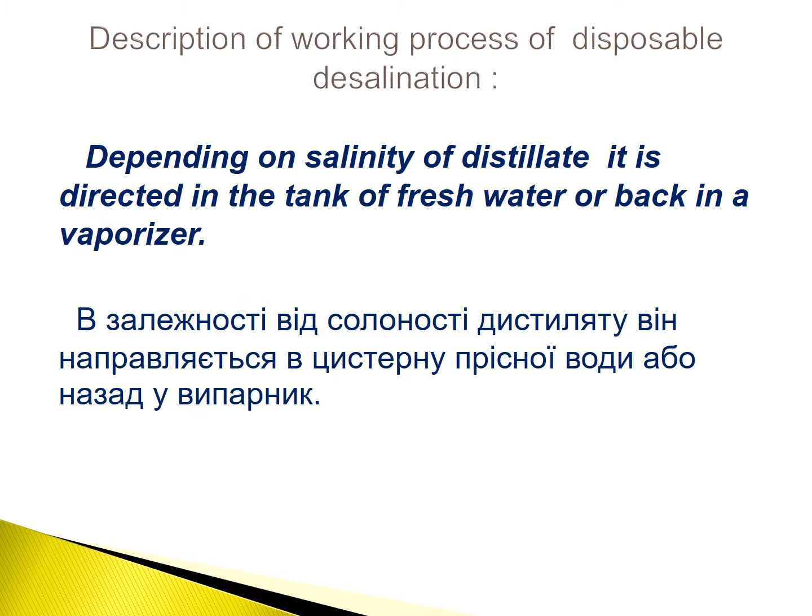In this technical video, we will understand the construction and working of a marine freshwater generator. Freshwater generator is used to generate freshwater from seawater on ships. The produced freshwater is mainly used for drinking purpose, for boiler water system, and for other freshwater consumptions.

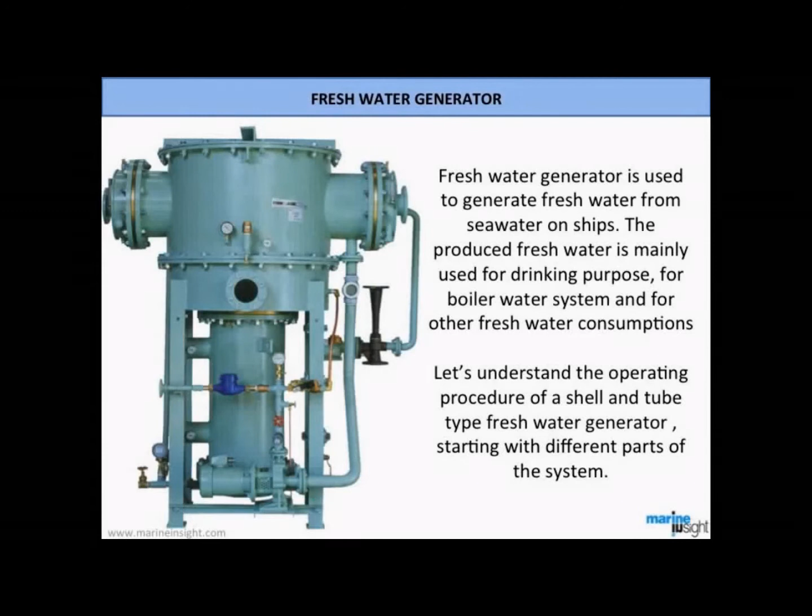Let's understand the operating procedure of a shell and tube type freshwater generator, starting with different parts of the system. The first component is a freshwater pump, which is used to supply the generated freshwater to ships' freshwater tanks by taking the suction from the generator. The normal rated capacity varies from 3 to 5 meter cube per hour, which depends mainly on the supply head.

The next component is the ejector pump, which supplies pressurized water to the ejector for creating vacuum. It also supplies cooling water to condenser. Rated capacity varies from 25 to 30 meter cube per hour and pressure 3 to 6 bar.

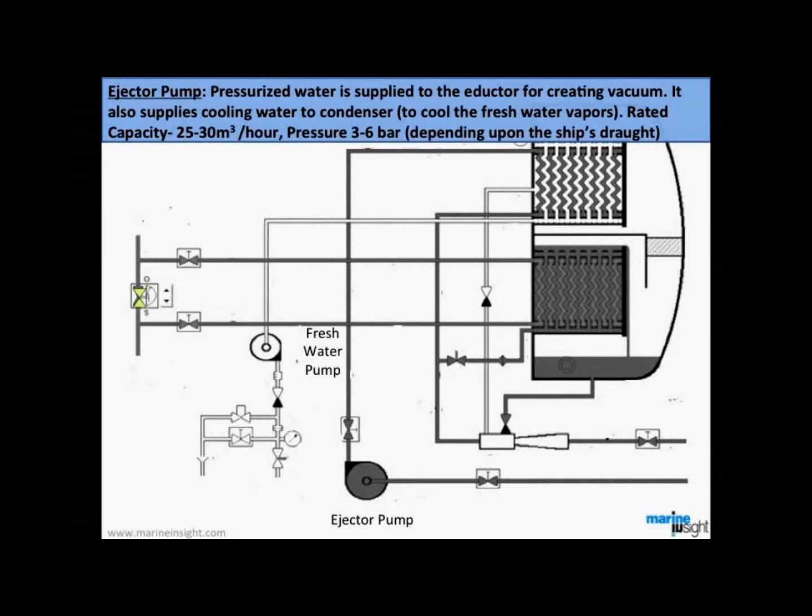Air and brine eductor is used to remove the accumulated brine from the generator and to create the necessary vacuum. Evaporator is used to boil off the seawater at lower temperature with the help of vacuum created inside the freshwater generator shell.

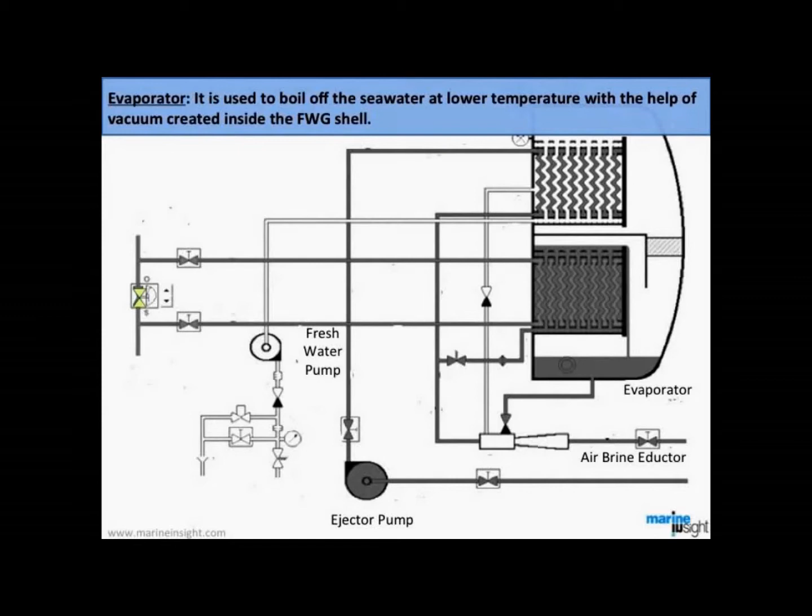Condenser: to condense the freshwater vapors and collect them in liquid form for further use. The other components of the freshwater generator are main engine jacket water line with a bypass valve, relief valve, vacuum gauge, thermometer, and a vent cock, which must be shut before operating the freshwater generator.

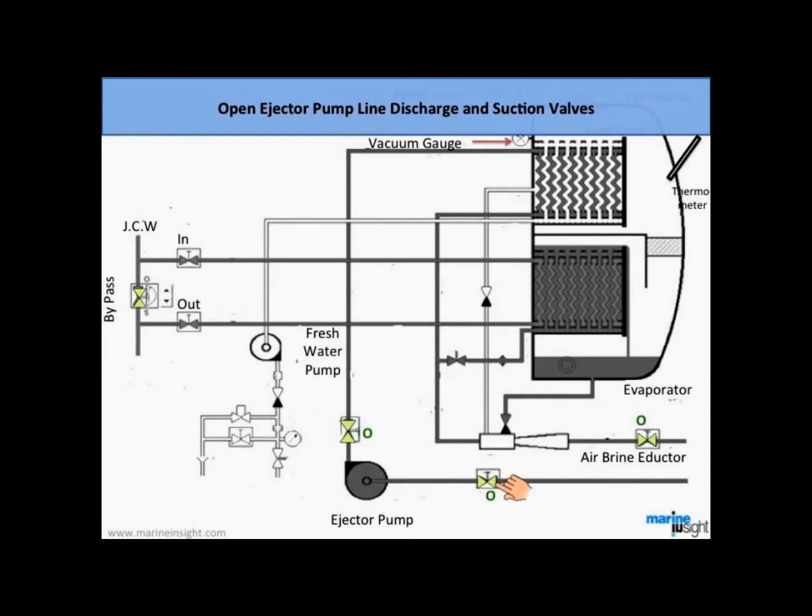Now let's understand the operating procedure of this equipment. Open ejector pump line, discharge and suction valves. Open the feed water valve to freshwater generator evaporator. Start the ejector pump. Water will pass through the condenser and air brine eductor.

Ejector pump also supplies feed water to the evaporator, which is then converted into fresh water. The eductor will also create necessary vacuum in the freshwater generator. Open the jacket water discharge valve and then the inlet valve to the condenser.

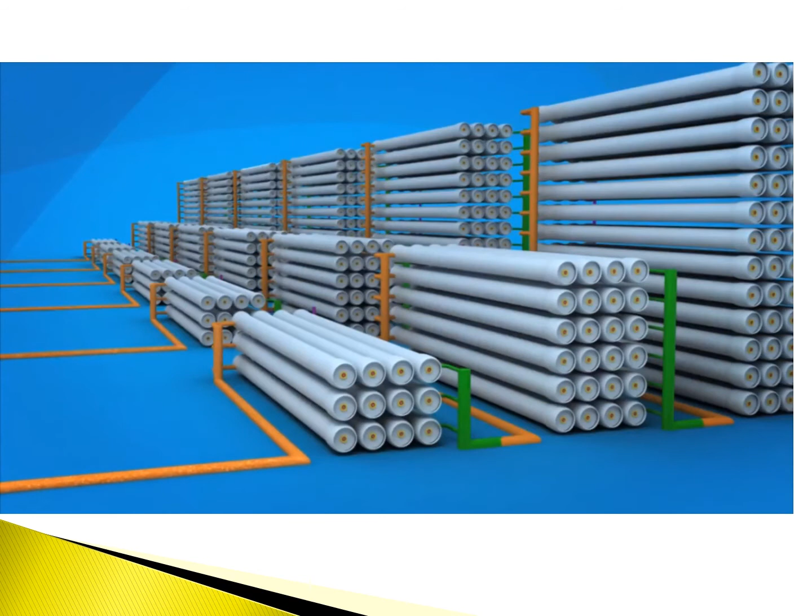The St Mary's Water Recycling Plant uses reverse osmosis to further treat wastewater after the ultrafiltration process. Reverse osmosis membranes are constructed from a membrane flat sheet. It is comprised of 3 layers: a polyester fabric support base, a microporous polysulfone layer, and a 0.2 micron thick polyamide barrier layer. The polysulfone layer strengthens the very thin barrier layer.

It is the barrier layer that removes nutrients, chemicals, bacteria, and viruses from the water. The membrane flat sheet is combined with a sheet of feed channel spacer. This provides turbulence and creates space between the membrane sheets for the feed water.

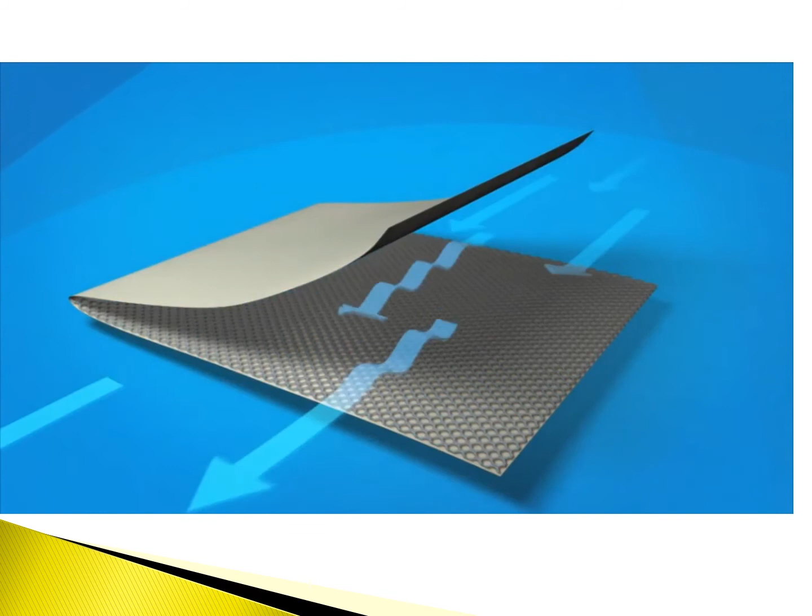A sheet of permeate spacer is added to the membrane sheets and feed channel spacer. This enables the final recycled water product, or permeate, to flow evenly across the entire membrane surface, even under high pressure. The back of the membrane is completely sealed to the edges of the permeate spacer. The membrane sheets are glued along each of the 3 exposed sides and rolled around the core tube.

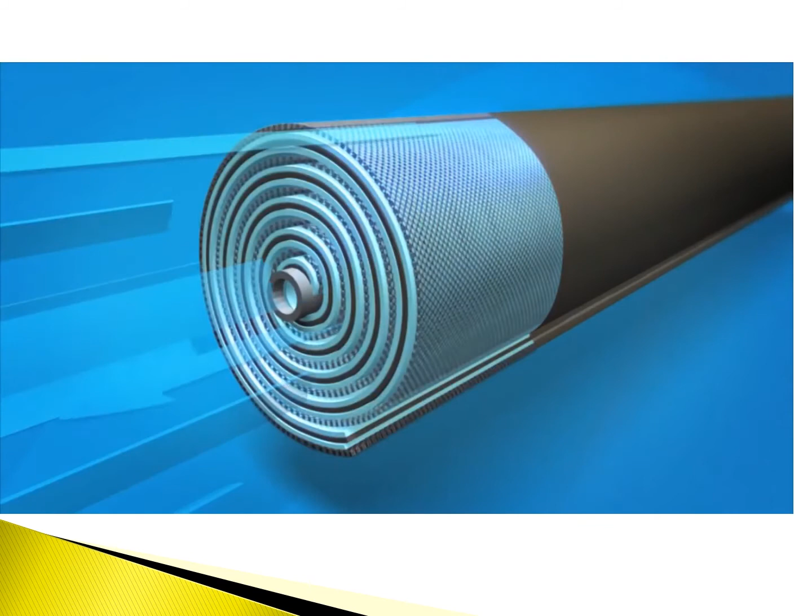Feed water is forced through the feed channel spacer and into the barrier layer of the membrane. Water passes through the membrane surface into the permeate channel. It flows in a spiral direction and collects in the core tube. This water is the final recycled water product, or permeate.

There are 7 spiral wound elements loaded in one pressure vessel. Once the end adapter is connected to the last element and the pressure vessel is sealed, feed water can be introduced. Feed water is pumped at high pressure into the vessel.

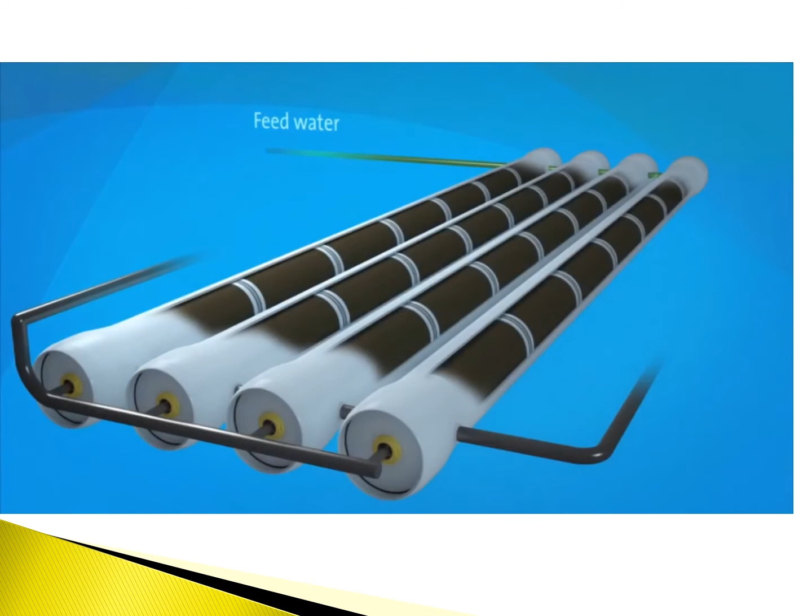As it travels, small molecules like water pass through the membrane, while larger particles such as salt, bacteria, and viruses do not. The final recycled water product is collected from the end of the elements. The concentrate or reject from that vessel flows to another stage, producing more recycled water.

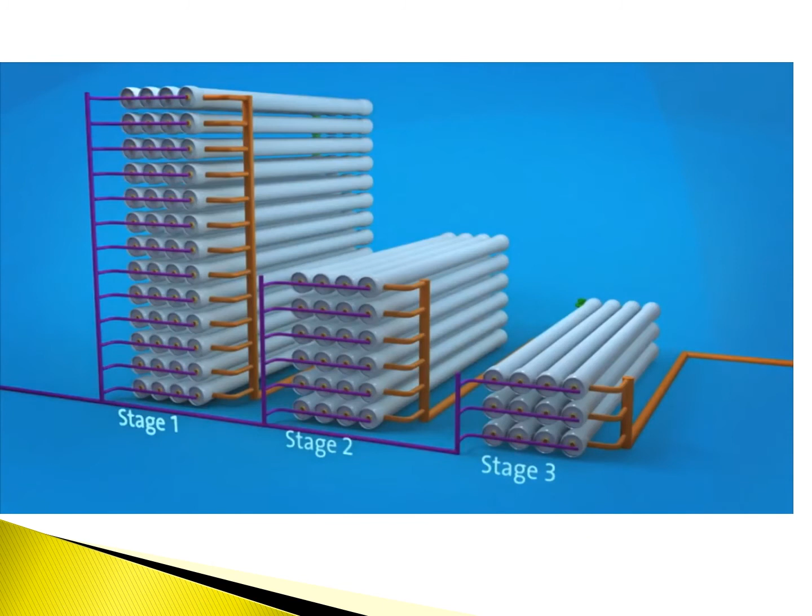At St Mary's, there are 6 reverse osmosis treatment trains, each with 3 stages. This design produces the highest amount of recycled water with reduced concentrate waste. Stage 1 has 52 pressure vessels, Stage 2 has 24 pressure vessels, and Stage 3 has 12 pressure vessels. 58 million litres of feed water enters the reverse osmosis system on a daily basis.

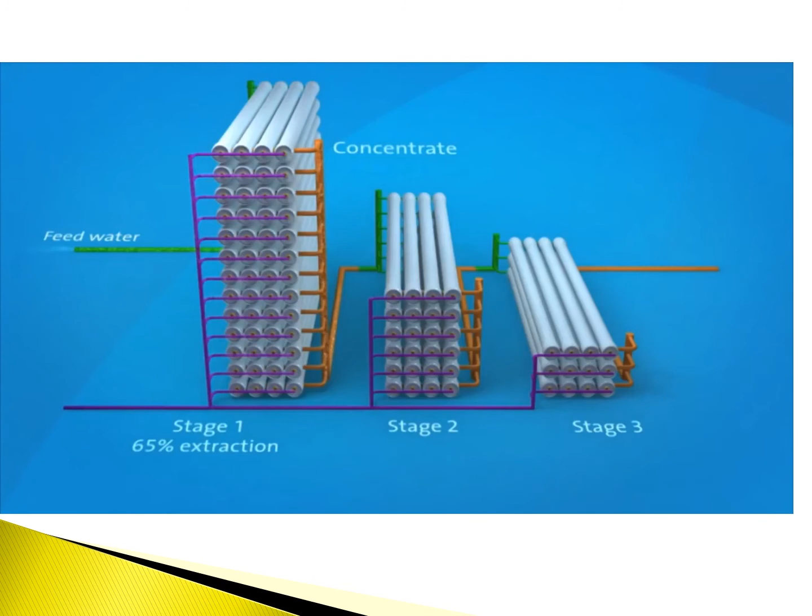As the feed water passes through each stage, more recycled water is extracted. 65% of recycled water is extracted at Stage 1. The remaining 35% is passed through Stage 2, where a further 10% is extracted. The final 25% is passed through Stage 3, where the last 5% of recycled water is extracted.

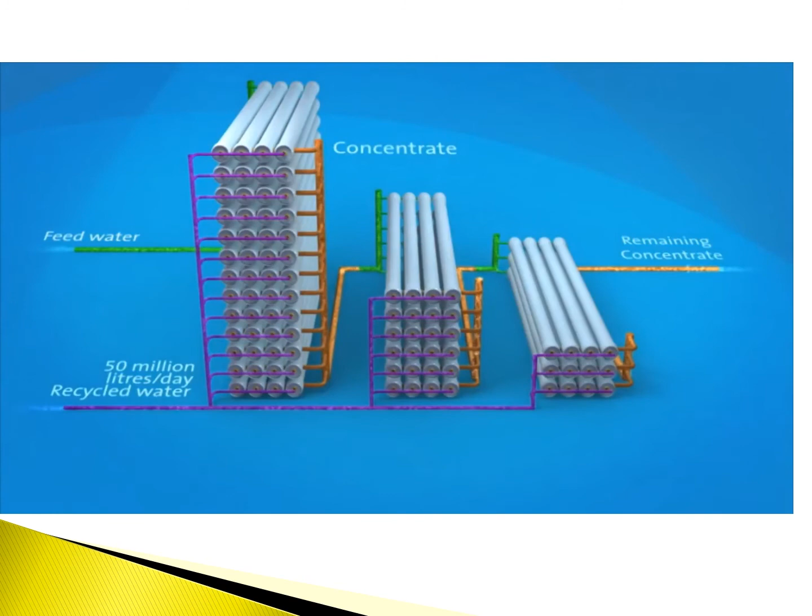80% of all feed water is recovered as recycled water. An average of 50 million litres of recycled water is produced every day at St Mary's. The remaining concentrate contains so much salt and impurities that to recycle it would not make economic sense. This concentrate stream of 8 million litres a day is sent to North Head Wastewater Treatment Plant, where it is treated and released into the ocean.